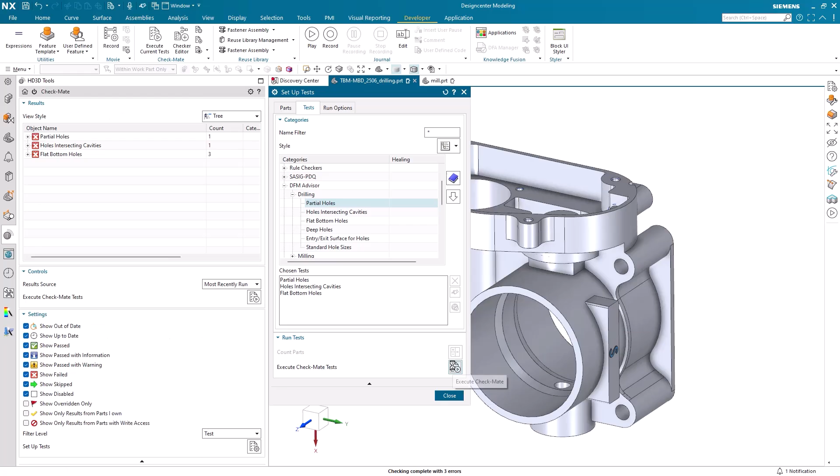You can see for this one that partial holes occur when a hole is located outside the material, which may lead to poor machining accuracy. Now returning to the test setup, once you've selected all your appropriate tests, you can initiate your checks by choosing Execute Check-Mate Tests. Once the tests have completed, it's time to assess if your part is truly ready for manufacturing.

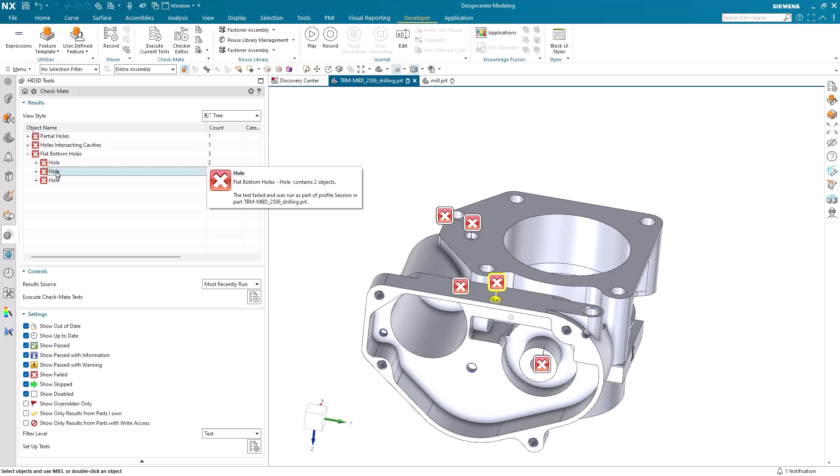On the left side of your screen, the Check-Mate results are clearly displayed. A red X signifies a failed test, and we can see that all three tests failed here. To quickly pinpoint issues, simply select any test from the navigator. This action will instantly highlight its corresponding error in the display window, making it effortless to evaluate the exact location of potential design flaws. For tests with multiple errors, you can easily expand them for a more detailed analysis.

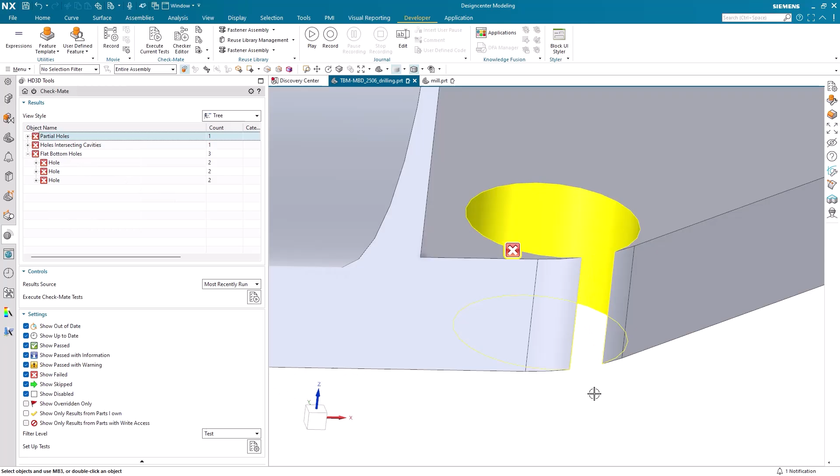Should you encounter a particularly challenging to locate error, a right-click on that specific test will allow you to use the Focus View on Tag option, providing a close-up visual of the component. This entire process is designed to streamline your review, significantly improving efficiency and simplifying the task of understanding your test results.

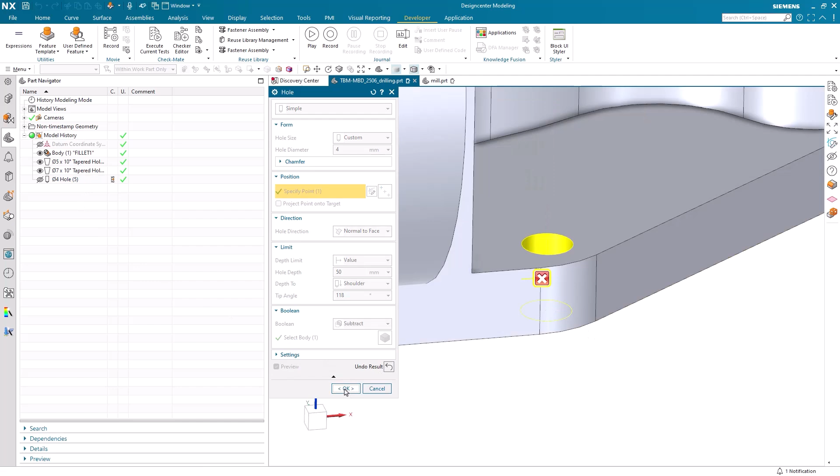Let's say for this scenario, we want to fix the partial hole that we reviewed documentation for earlier. If we address the issue and change our hole diameter, our checker won't go away until we've executed our tests again. This is because the system needs to reevaluate your design against the updated criteria.

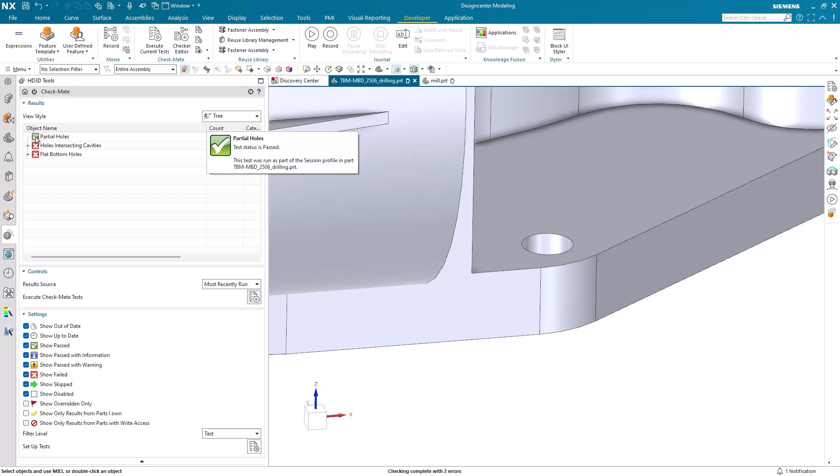To update the results and see if your fix was successful, simply navigate back to the HD3D Navigator and select the Execute Checks option. The system will then quickly reprocess your part with the new hole diameter. If your fix was successful, you'll see that red X transform into a green check mark, confirming that this particular issue has been resolved.

Now let's shift our focus to a different part and explore the milling tests available within DFM Advisor. Instead of navigating through the Developer tab, another way we can edit our tests is through the HD3D Navigator. To begin, you'll want to clear out any previous selections by highlighting your old tests and clicking the X on the right side of the window. With a clean slate, you can then select the new milling checkers you wish to perform.

As you add these, you'll find valuable options to customize them. For instance, some tests involve setting precise pass-fail values. Others might require setting a specific directional vector tailored to your manufacturing process. It's highly beneficial to explore these customization options, especially if your company has specific manufacturing best practices to adhere to.

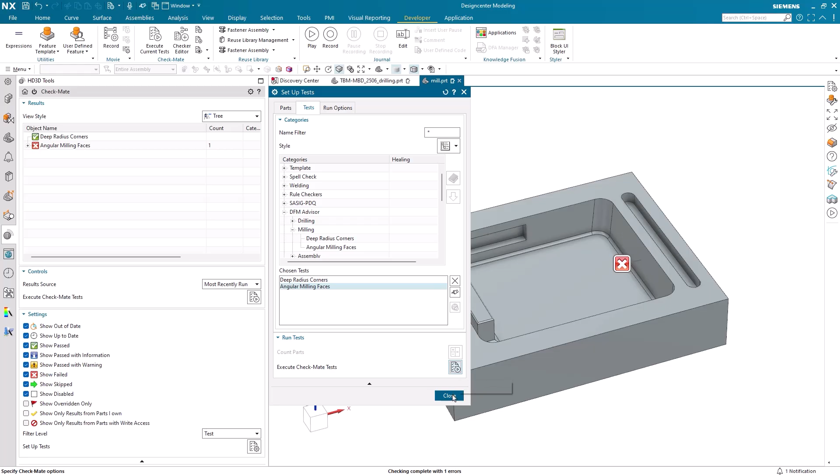Once these customized milling tests are run, you'll again observe that some checkers might pass while others indicate a failure. This immediate feedback is incredibly valuable. Identifying and rectifying such design flaws early in the process, even before manufacturing begins, can save critical time and money, truly underscoring the power of proactive design validation.

In conclusion, in this video, we've explored how to use DFM Advisor to review our designs for potential manufacturing flaws. We started by setting up our tests and reviewing documentation for extra help. After that, we reviewed our test results and looked at key ways to make this an efficient process. And finally, we wrapped things up by reviewing customization of checkers and the impact this would have on our testing.